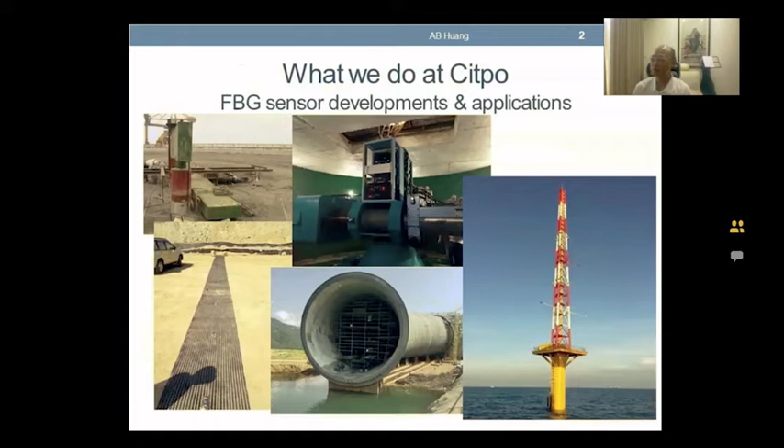My name is Huang. I'm representing CITPO Technologies in Taipei, Taiwan, to talk about photonics applications for disaster prevention. What we do is mostly concentrated in the development and applications of FBG sensors. Most of the applications are related to ground behavior or any disaster that may occur in the ground. To start with, I would like to give a very brief introduction to FBG, what it is. Optical fiber Bragg grating is the full name.

It's basically a change in a small section, about 5 millimeters long, of optical fiber, where the refractive index changes periodically. The optical fiber has a diameter of about 250 microns. It's about the size of a human hair.

The periodic change of this refractive index is similar to putting your five fingers on your arm and exposing the arm under the sun. After a while, if you take off your hand, the uncovered parts will turn dark, and the covered part will be light, sort of like this grid pattern in this slide. Except in FBG, we may have about 10,000 of these grids concentrated in about 5 millimeters length.

The spacing between the lighter and darker parts we call capital lambda. And when we insert laser light into the optical fiber, when it encounters the FBG, part of it will be reflected back. The wavelength of the reflected light, lowercase lambda b, is related to the refractive index and capital lambda, the spacing of these grid patterns.

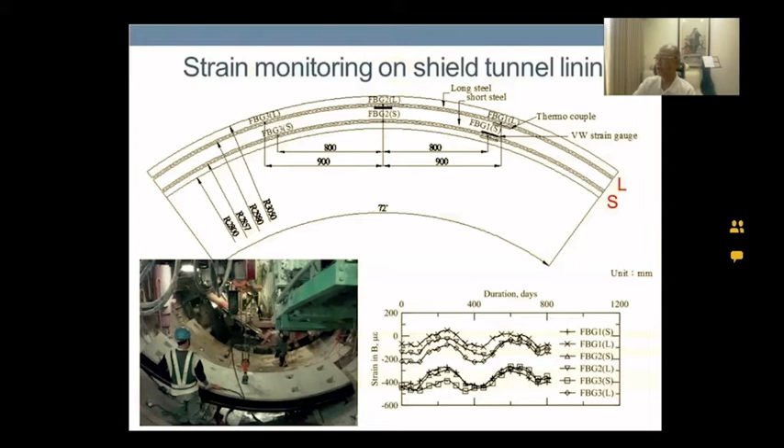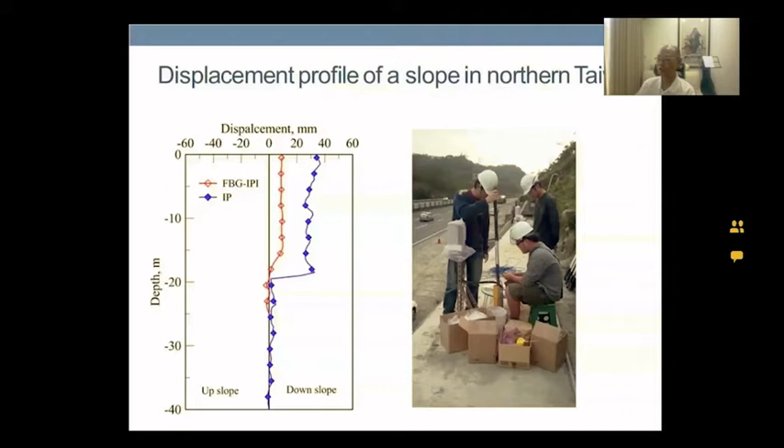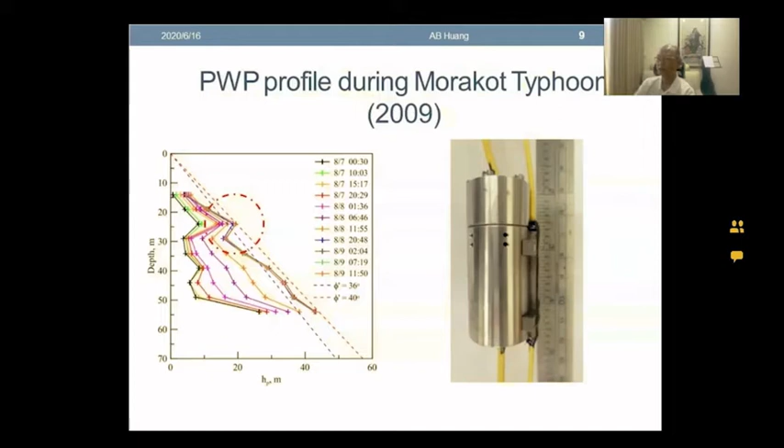In this case, just to give you a very basic sense, the pore pressure increased by as much as the equivalent of 30 meters of water level, which is about 10 stories high. So the increase of pore pressure is very extreme, and that's why it caused a lot of slope failures in that region during that typhoon. That also tells you the importance of monitoring.

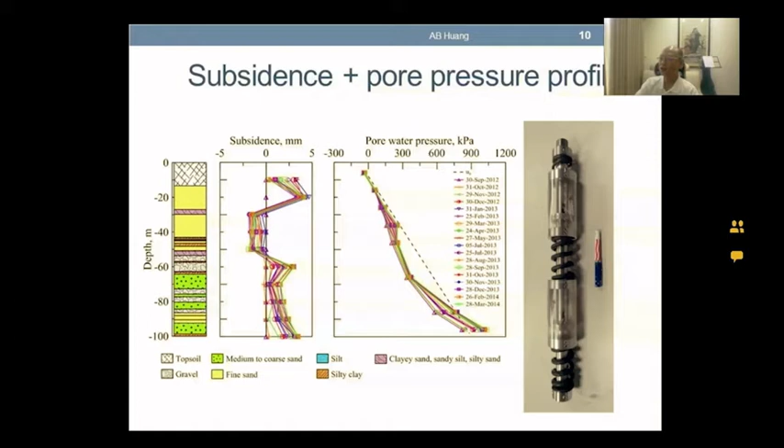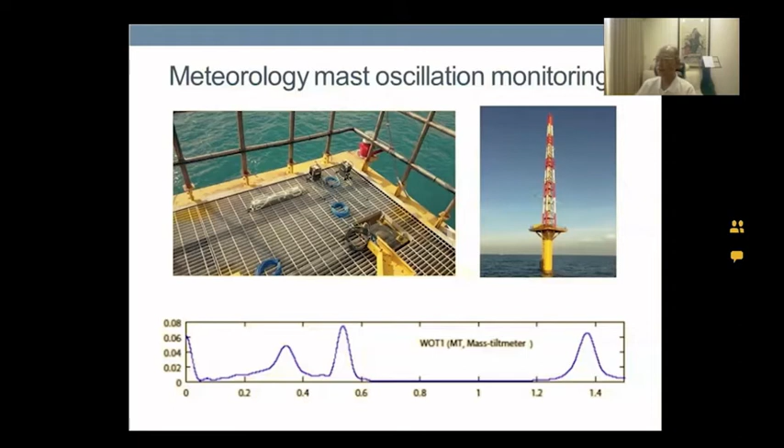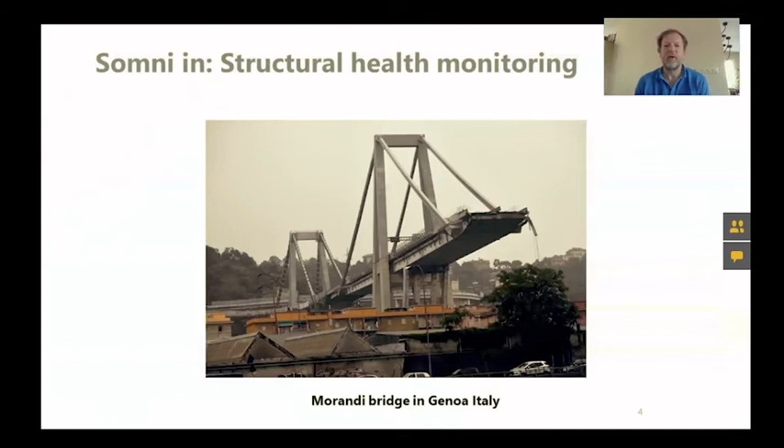To start with preventing disasters, we probably all know this bridge. This is the Morandi Bridge in Genoa, Italy. About 2 years ago, it completely collapsed. That was a big disaster and quite unexpected for a lot of people. But on the other hand, they already knew that there were things going on with that bridge. At the moment they are building a new bridge.

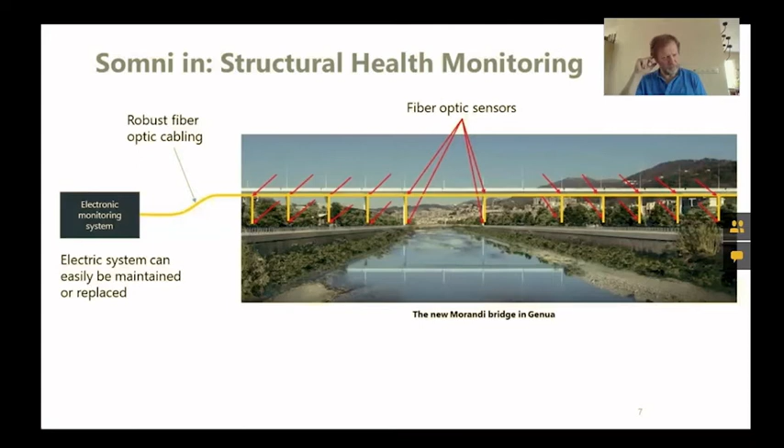Well, the big question is, why do people use fiber optic sensing for these kind of applications? And that all has to do with robustness. It is a fact that the fiber optic sensors are extremely robust and have a very big lifetime. That's a topic I would like to address a little bit later again.

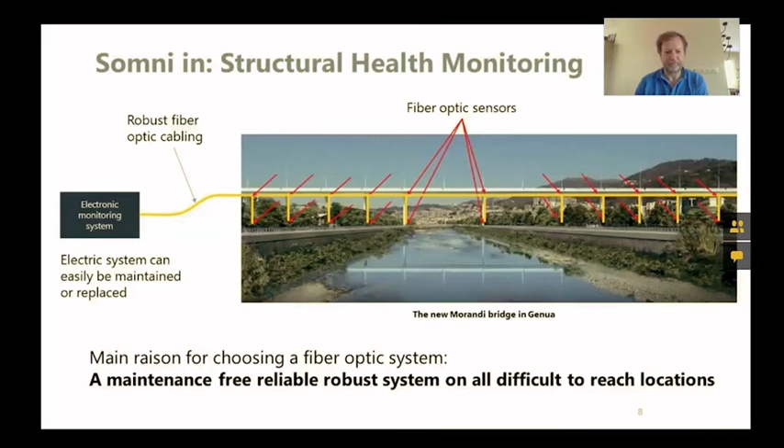Another thing that Somni is busy with, for example, we make a lot of sensors. We also have sensors in the medical field. We make sensors for defense, hydrophones, very little pressure sensors, things like that. But I wanted to pick out one because I think it's very interesting.

These are sensors that we built at the moment for a big science project, and it's called ITER in France. We probably all know the ITER project. It's a very big nuclear fusion project taking place there, in which nearly all the world is involved - China, Russia, the USA, Europe, Japan. All countries are involved in that big ITER project.

There's a lot of radiation there, and it's a lot of vacuum parts. So we took one of our types of sensors, the 80 picometers per G sensitivity sensor, a standard sensor, and we modified it for vacuum compatibility and made it radiation hard and stable up to a temperature of 170 degrees Celsius.

At the same time, they also needed temperature sensors, so we also developed vacuum compatible, radiation hardened temperature sensors, which can range up to 300 degrees Celsius. These sensors must be ready in September this year and then will be shipped to the ITER project. And as you can imagine, there's also in this case a very big issue with reliability and robustness of the sensors. So I would like to give that some extra attention.

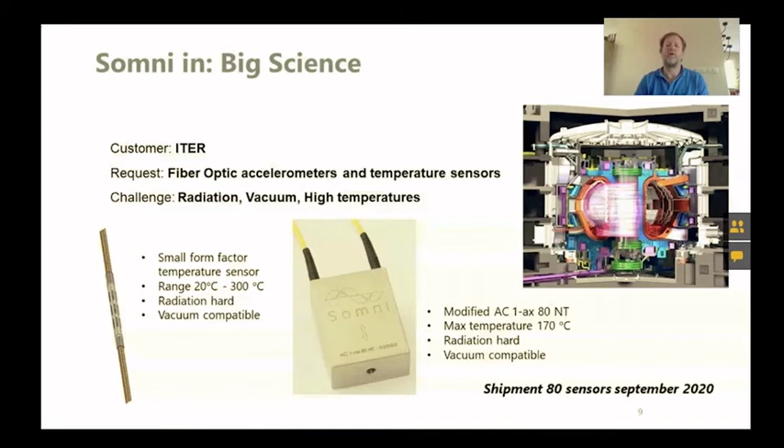We make very small movements - only movements of less than 20 micrometers. That's about a third of a hair thickness. And the stresses in our materials during its lifetime are very, very low. It is always below 0.5% of the maximum load allowed for that type of material.

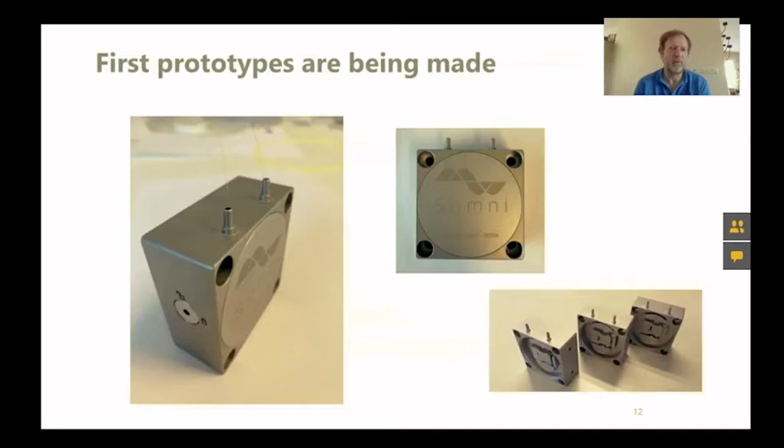The sensor is already being tested at TNO. We did do 2 types of tests. One test for the little bit higher frequencies, that is the left testing area. That's a very big shaker. And we did shake our sensors there. You can see them in the middle of the plate. And at the right side, we tested even lower frequencies on a universal testing machine.

And that was quite okay, but still can be improved. Something went wrong there, and if you see the test results at the right bottom, then you see that the sensor 2 died, or one of the FBGs broke, and that was because there was made a mistake in programming this testing machine, and the sensor got about 5 times the allowed

maximum acceleration that it should have, so one of the fibers broke. But what you see with the results is that they're all, the good working sensors are above 1000 picometers per G, which is what we intended to do, so that's very nice. So we think we have very good test results with the first test.

At the moment, we are developing a new generation of sensors to get better results and maybe also a little bit lower price. That would be nice. And this test will be done again at TNO with the new sensors, and they will try to improve the testing a little bit so that we have better results. And then a new exciting period will start, and that will be testing together with Citpo in Taiwan.

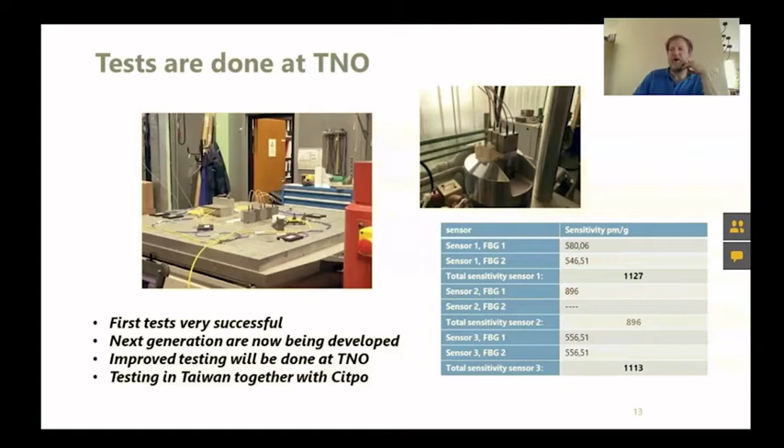And I think we found the best test location and the most exciting test location you can ever find in your life, because we are allowed to test this sensor on the golden sphere that is in the Taipei 101. The Taipei 101 has been the biggest building in the world for about 6 years, from 2004 to 2010. It is 508 meters high with 101 floors.

And the Taipei 101 is, of course, built in an area where there's lots of earthquakes. So to protect it against these big shocks, they put in a sphere at the top with a mass of 728 tons, all supported by dampers around it to dampen the vibrations in the building and to, let's say, eat the energy out of an earthquake.

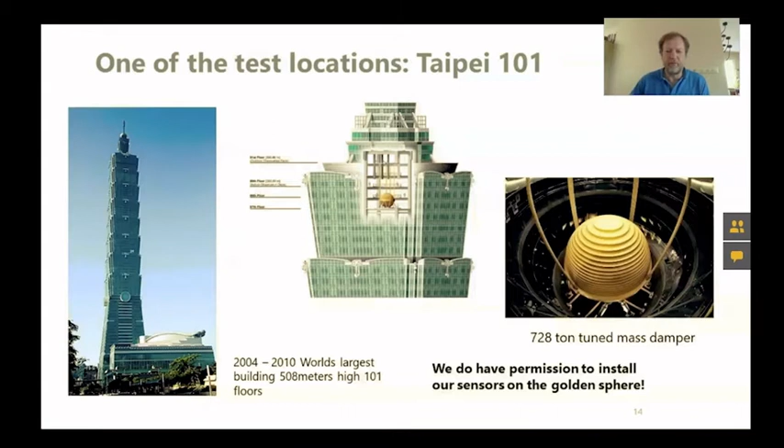So we are allowed to put sensors on the golden sphere, which is really the best marketing place in the world, I would say. There is already a lot of sensors in the Taipei 101, also frequency sensors for low frequencies, and they are measuring there day in, day out, all day, all the year.

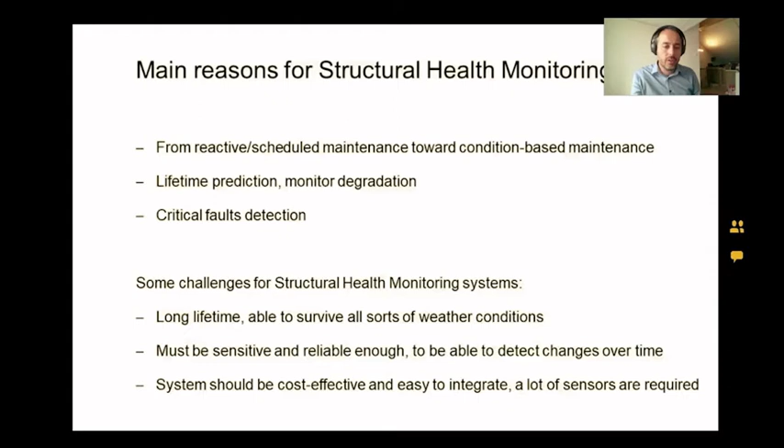If you look at the current trends today, I'm not completely sure about the numbers in Taiwan, but 1 out of 5 bridges in Europe is in poor condition. That means they are at the end of their lifetime, and they probably need to be fixed soon. And so new construction and innovation projects start to more and more integrate structural health monitoring solutions. And basically, a good structural health monitoring system can extend the asset lifetime and avoid failures that are very costly.

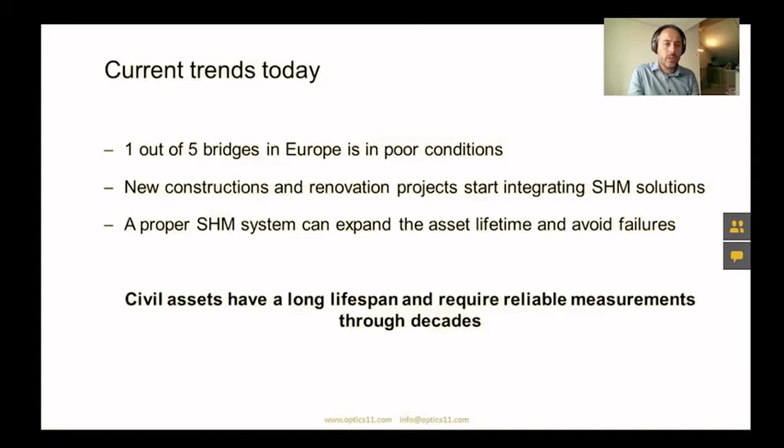Now, what does fiber optics bring to this solution? You're probably all aware of the advantages of using fiber optic sensors. But for structural health monitoring, I want to highlight a few of them. You can have a dense grid of monitoring points, so it's easy to chain a lot of sensors together and fix them all to your asset.

It's long-term stable. There are only a few parts inside those sensors, so they can last for a long period of time. They can also be far away from your measurement system, which is the big investment of your system. And they can be exposed to all kinds of environments, which is also very important. Lightning, weather, liquids, radiation are easily dealt with by fiber optic sensors.

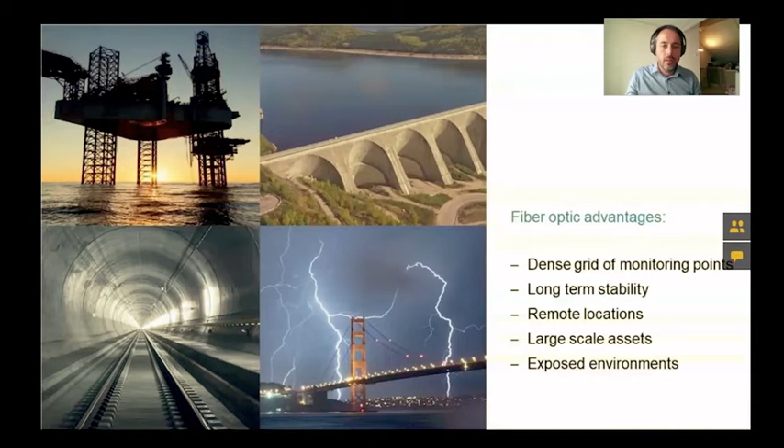Now, if you look at a fiber optic system overview in general, you have a readout on the left, which can be stored far away from your asset. In this example, it's a bridge. Then you connect that part with some cabling, which can be up to kilometers long, because it's only light that goes through the cable. And then you look at your sensors at the asset.

They're completely passive, so there's no power required. So that makes it very useful. They're very sensitive, and they have a very low noise level over long distances, immune to all kinds of radiation. And as said, they're very rugged, so they can withstand all outdoor conditions, including lightning, for instance.

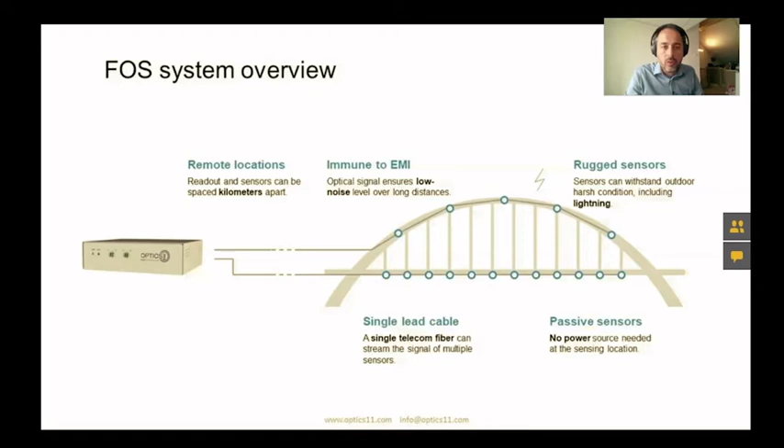Now, what does Optics11 technology offer to this application? Basically, we're focusing on 2 types of systems. The first is the NovaFAS, which is the most accurate and precise FBG system available. It covers the low frequency measurements, so strain, temperature, and load, and it measures those parameters over time with a high level of precision.

And on the other end of the spectrum, we have an acoustic emission system, which looks at the high end, when cracks are actually occurring in the structure, up to hundreds of kilohertz, and that system is called OptimAE. We have a broad portfolio of fiber optic sensors that we connect to both of those systems, the application experience to install them, and a very reliable partner network that we can involve to do the installations.

A few words about the systems themselves. So again, the NovaFAS is a high-end FBG. What makes this system unique is that it's self-calibrating. Each time we send a sweep of light into the fiber, the light wavelength is calibrated. So that means there's long-term stability over time.

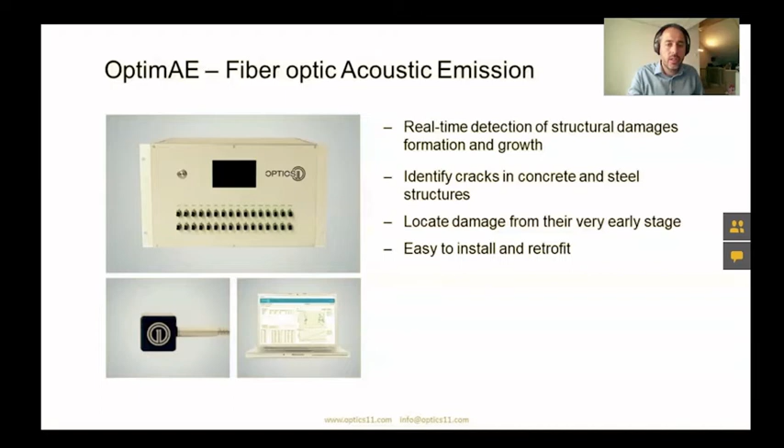Of course, if you install a system, you need the infrastructure as well. So as a system provider, we also provide the accessories and the other things that are required to make a full system. So the cable network, the place where you can store the equipment, the readouts, and also the access to the outside world, because you need to look at the data.

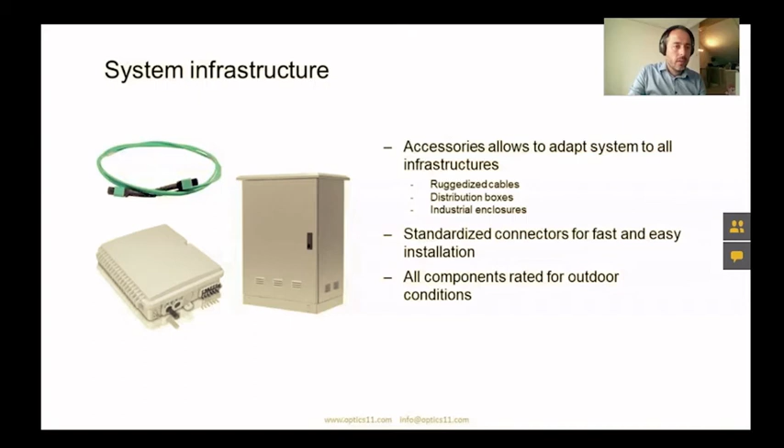If you look at the data itself, we provide a very basic portal that can look real time at your data from the asset, and I think this is quite interesting because if you have all your sensors connected into a network, you would like to have monitoring or warnings when a certain threshold is crossed.

So what we do, we have a local site which has the sensors and the data acquisition, basically the data goes to the data gateway and will be sent out to the cloud through either a wired or wireless network. And from the cloud, it can then be accessed through a web portal, where you can look at your data real time, and you can customize these dashboards to the asset or to the type of sensors that you would like to monitor.

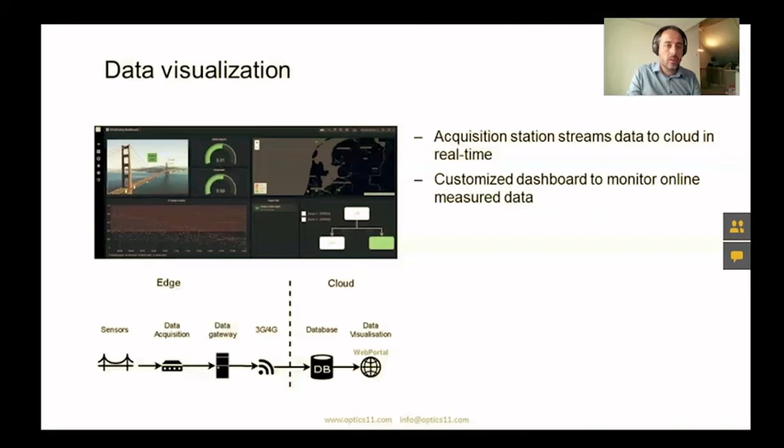I would like to discuss some of the examples where we applied these systems. So this is a bridge, the IJsselbrug in the Netherlands. Basically, this is the real-time monitoring of critical spots of this bridge. It's a concrete bridge, and we were involved in installing 35 strain and temperature sensors and measuring this bridge over time.

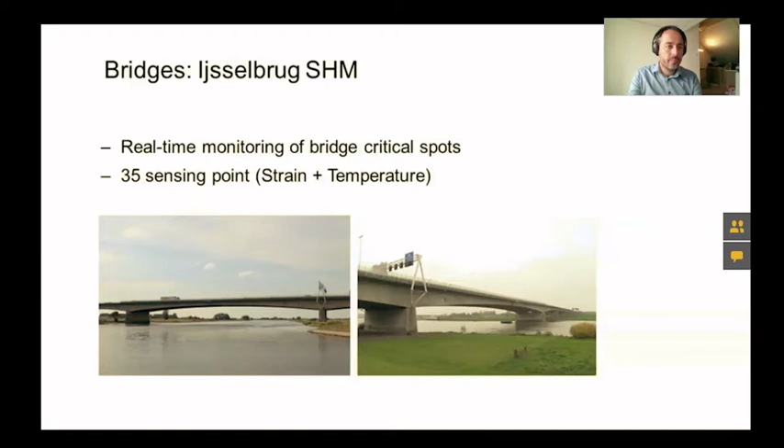Another example where this is applied is in a cave, a marl cave in Valkenburg in the south of the Netherlands. And their question was to have real-time measurements on the stability of the cave. There are a lot of tourists going inside each year, and safety is their concern, and they want to know whether there is any movement of the ceiling. So we installed 80 sensing strain strips, as you see in the picture, which see whether the ceiling is stable, yes or no. Of course, with the dashboard as well.

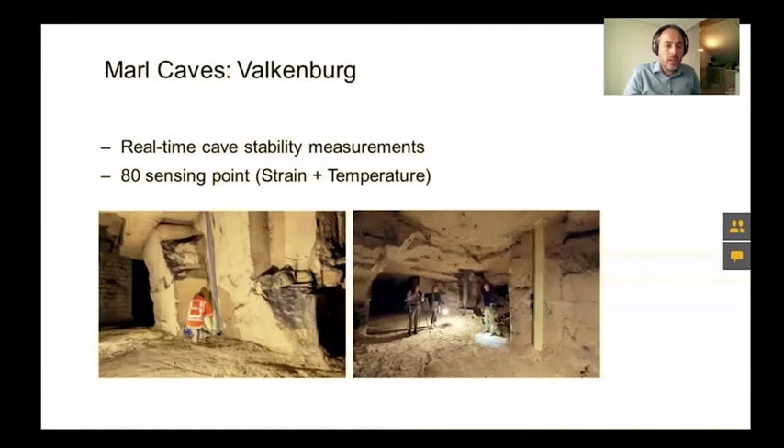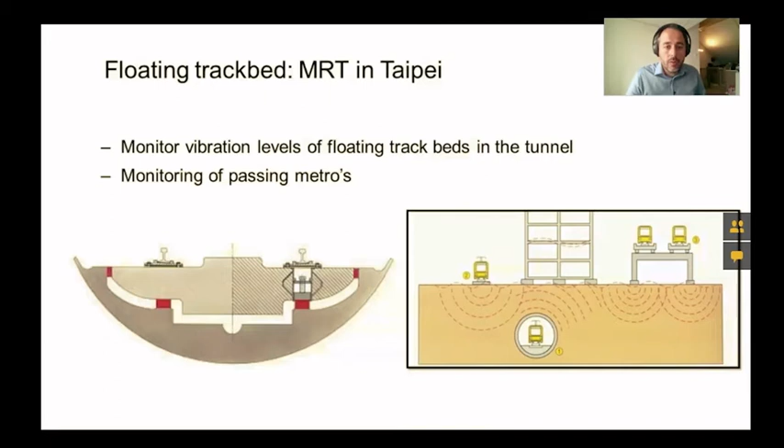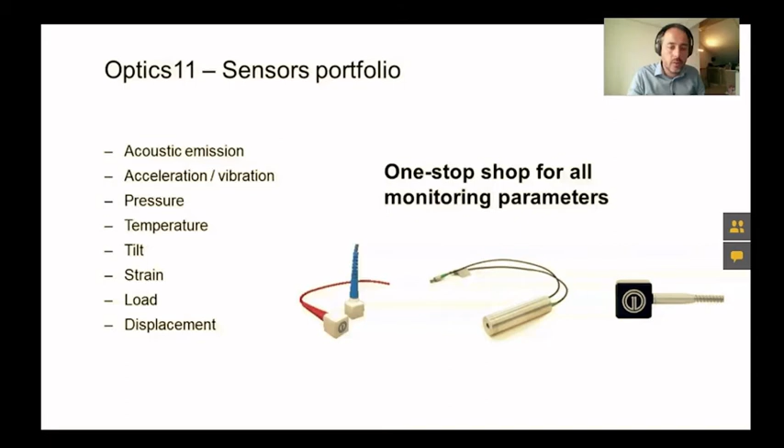Now, the last slides are about Optics11 as the company. So we like to consider ourselves a one-stop shop on monitoring parameters. That means if you want to look for high-end acoustic emissions or high acoustics, you might measure vibration, all the way down to strain and load and tilt sensors at a low frequency with a long and stable period. We have a solution for that. We make everything ourselves, so we have complete control over the complete setup.

Basically, we are based in Amsterdam. We have a small R&D office in Dublin and a distribution network all over the world. And we are at 55 people and growing heavily, and looking forward to seeing what kind of challenges we can solve in Taiwan.

Let's go to some questions. Maybe in the meanwhile, a question to Optics11. I see also that you work a lot on the visualization and with software. Do you think the software development becomes more and more important?

Basically, that's something that we recently started, and I think it's a very powerful tool at the end for the end user and for the asset owner to have real-time access to the data. Of course, it's very technical and very difficult to install and make sure that everything works. But basically the question of the asset owner is just how is my structure actually doing and what is actually happening at this time.

And by providing this in a cloud-based solution with some basic parameters, you can actually evaluate this every time of the day, and with some thresholds installed you get a signal that some values are crossed. We think it's quite powerful. Okay.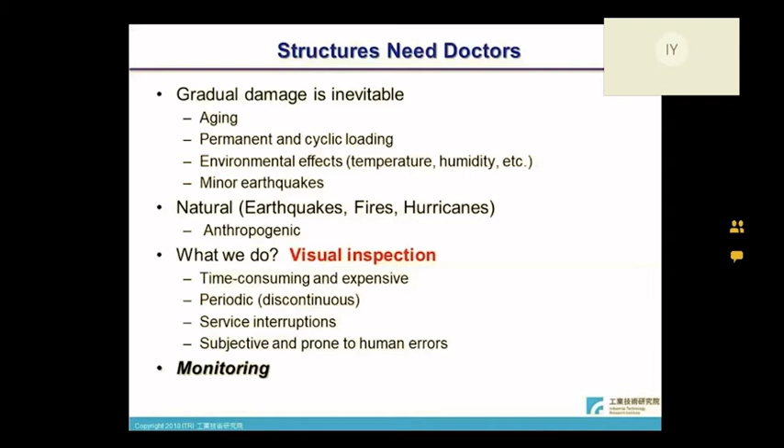This year we have a new project about structural health monitoring through a digital twin. The idea is to connect the real world and a digital world together. We consider design, operation, IoT data, analysis, machine learning, and IT integration.

This year we took an oil tank as a sample, and we used LiDAR scanning of the profile to diagnose which is deformation and which is corrosion, and we show it in the digital world. In that topic, we noticed that corrosion happens all the time in Taiwan, much more than deformation and other problems.

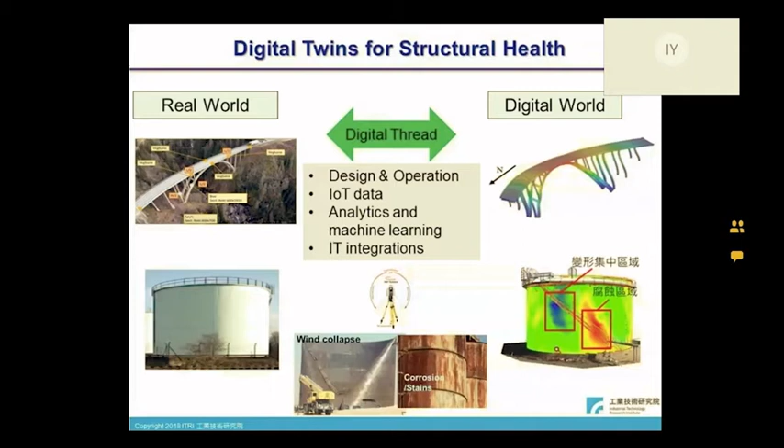So we have a new idea to share. The corrosion problem in Taiwan is very serious, like atmospheric corrosion, pipeline corrosion, environmentally induced cracking, MIC, and CUI. This corrosion causes a lot of cost in Taiwan, especially in the petrochemical industry.

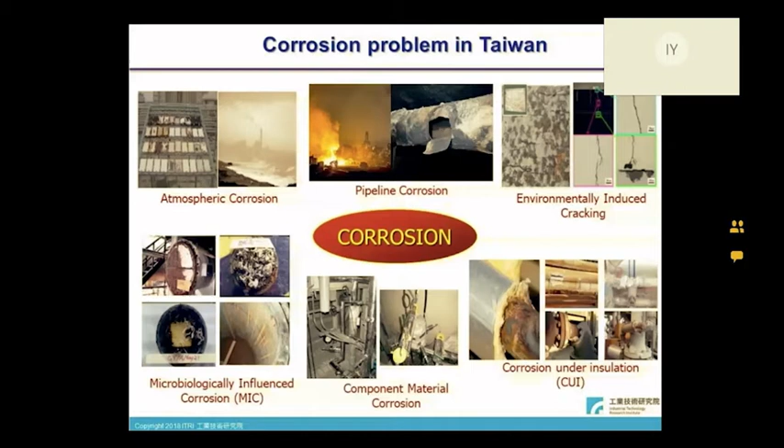ITRI, our division, put a lot of effort into solving this problem through new and old skills like NDT technology and corrosion monitoring technology. In NDT, we find the location according to the risk matrix, and we use UT sensors, laser scan, RT, and failure mechanisms analysis and implementation.

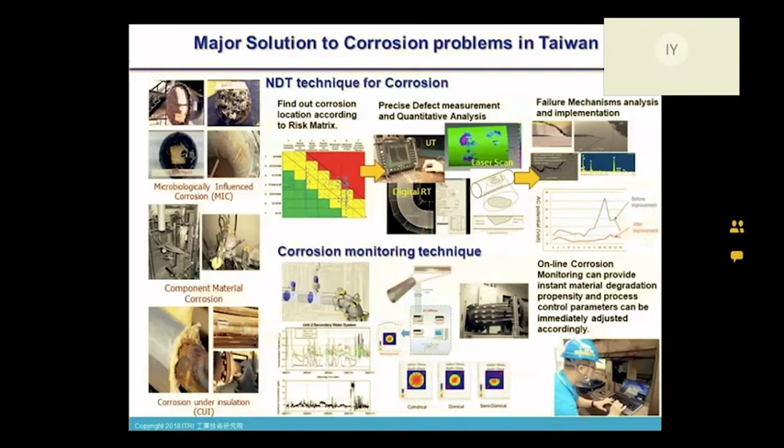For monitoring technology, we always put ER probes into the pipe, or we do online monitoring with UT. However, this technology is not good enough. Last year we had some cooperation with Mark, and we noticed that fiber optics is a very powerful sensor for monitoring. So we have a new idea starting from the mechanism of corrosion.

We want to protect our structure from corrosion, so we have a paint system on our structure, like epoxy and PU for UV resistance and water resistance. However, like I just said, aging and degradation always happen, like blistering, cracking, and rusting.

We noticed that all these phenomena change something fiber can sense. They cause temperature change on the surface and some deformation on the surface. That's what we want to measure through fiber optics.

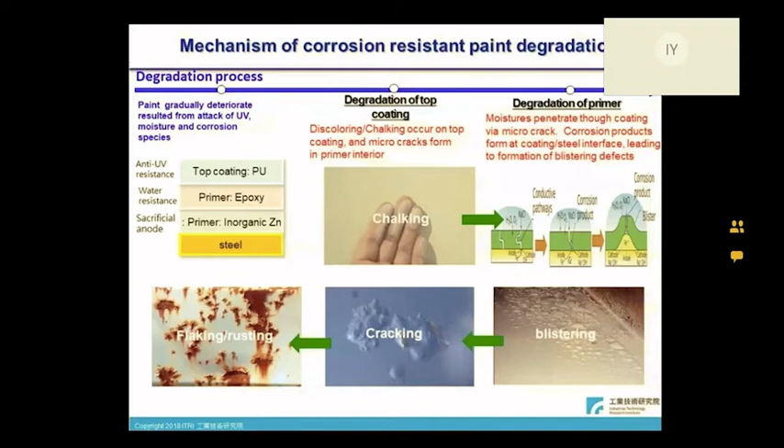As I said, ITRI put a lot of energy into anti-corrosion, so we already know the paint system design. So here we have a new idea: can we design through the paint system, control the corrosion mechanism, and decide what phenomena should be shown and monitored?

So we put it all together in a new cycle: we do a new design for the paint system, and based on this design, we design our new monitoring system with optic fiber. I'm sorry it's a little rough here, and this is my presentation. Thanks for your attention.

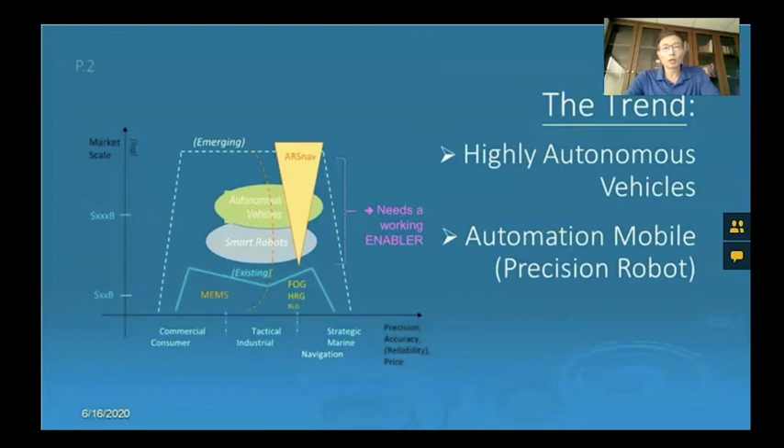So what exactly can ARSnav offer and how? Unique design is one of the key factors, and efficiency in process and integration are the other 2, from which the industrial infrastructure here in Taiwan does benefit. We also plan to have more key components made here in Taiwan. Our Precision 100 series is engineered for general navigation, stabilization, and precision attitude sensing feedback. This one is scheduled for launching this October.

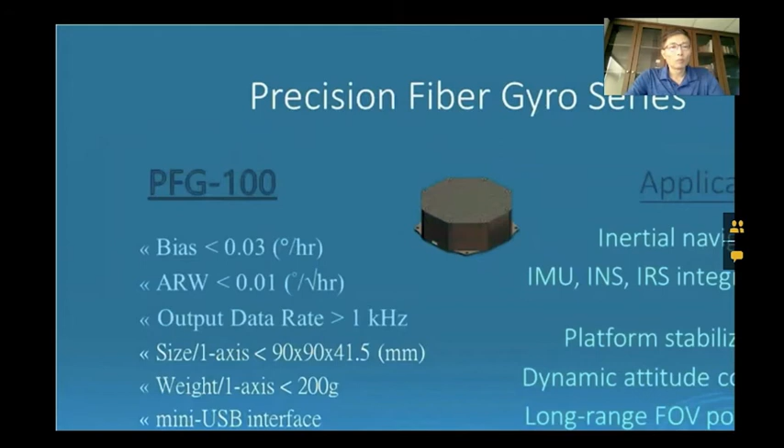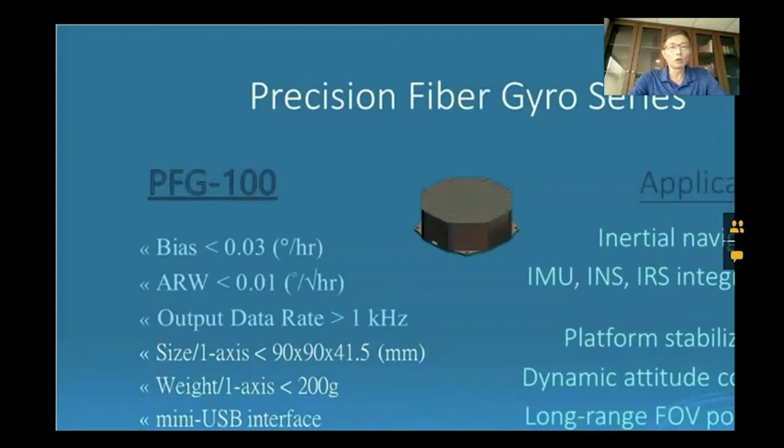Here's our higher sensitivity series, intended for deep, autonomous, and long-term operation. This one, higher sensitivity fiber gyros. Okay, let me quickly explain to you how the 2 most important parameters of a fiber gyro correlate to navigation accuracy. First one is the bias of a gyro. It's the angular rate output when the sensor is actually static. Ideally, it should be 0, but usually it is not. So you can imagine how it accumulates into large angular errors as the task operating hours increase.

Assuming that the deterministic part of the gyro has been calibrated out, say, by accurate modeling, then you will see angle random walk as the fundamental limit of your accuracy. For example, here is our gyro, which was tested to have an angle random walk parameter of 0.002, or 2 milli-degrees per square root hour. Then how to use that in practice? You just multiply this parameter by the square root of the operation hours. Then it will give you the cumulative error in angle at the end of the task.

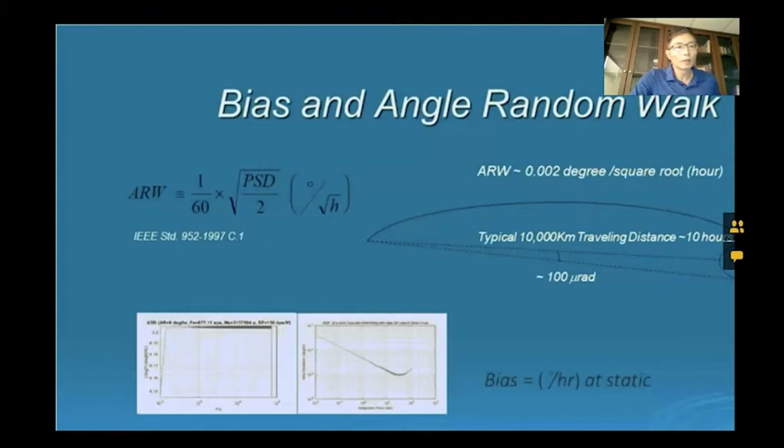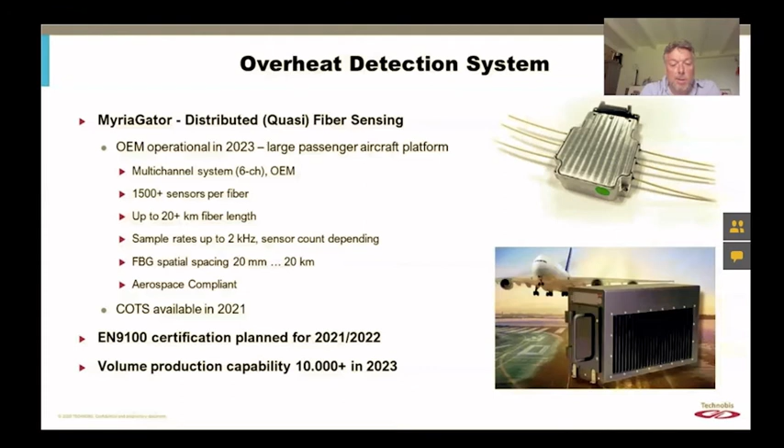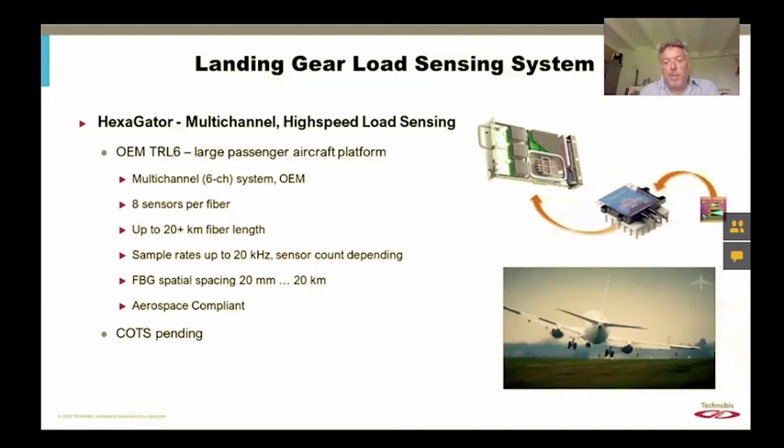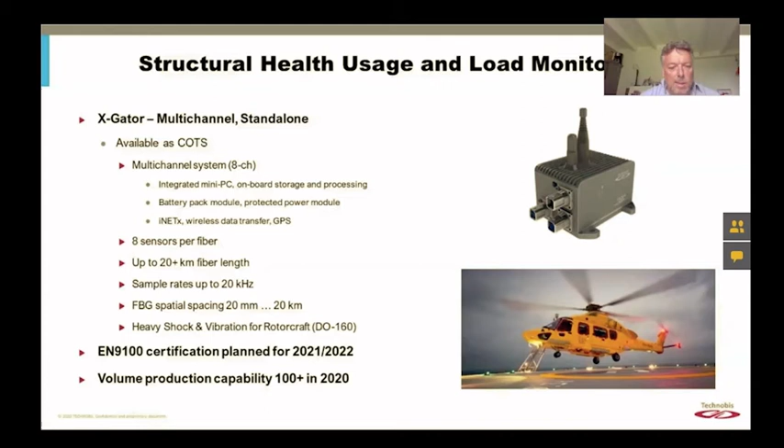Another example is extreme dynamic loads monitoring. It's one of the many research programs where we investigate using fiber sensing for various applications in aerospace, typically structural health monitoring, where we look at damages, impacts, and load monitoring on structures.

With extreme loads, you must think about large deflections that can happen at aerospace structures which we need to monitor, and at the same time small vibrations or low amplitude vibrations if there are any during operations. For that we developed a system, the Supergator.

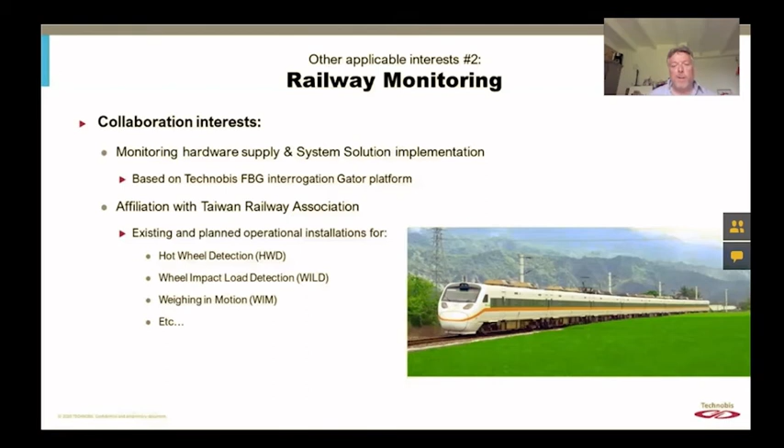So then the products, about our vision, how we see this developing. Next to the OEM type of developments we do for aerospace, which are very dedicated systems for specific applications, we have a general roadmap where we anticipate a volume market more and more.

A little bit of history: in the early days of Technobis, when we just started with fiber sensing, we built a free space optics device called the Deminsys. Around 2011 we started to use integrated optics technology, on a request of ASML in the Netherlands, a semiconductor company. They needed a sensing device that was cost effective but still extremely high performing in high resolution measurements, and we managed to do that only with an optical chip, where the conventional free space optics technology was not capable of doing that.

In the laboratory, we managed to detect wavelength shifts in the order of attometers. That's one of the big advantages of optical chips: they are small, so you can stabilize them mechanically and thermally, and make them sensitive in that way.

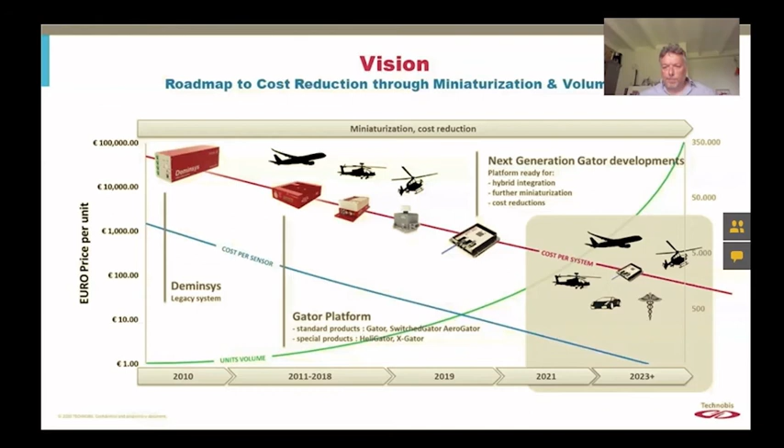We anticipate the prices go down per system, the cost of sensors goes down, while the volumes are going up. It's of specific interest to markets like automotive and medical. Okay, so that's about the vision. We have a strategy.

We're developing our technology in 4 generations. We had our first generation as free space optics. Then we started to develop generation 2 with the standalone desktop systems, which we call Gator systems. Nowadays we are in generation 3.

Which we launched for high volume medical applications, railway, wind turbine, road monitoring, pipelines, and so on. And the next step would be generation 4, which we just started.

This is really about extremely low cost standalone devices the size of a USB stick or a matchbox, applicable to high volume markets like medical disposables for guide wire and catheter systems, automotive battery measurement systems for thermal management in electric vehicles, perimeter sensing, data centers, temperature monitoring, but also security, and so on. So we are really anticipating high volume in this case.

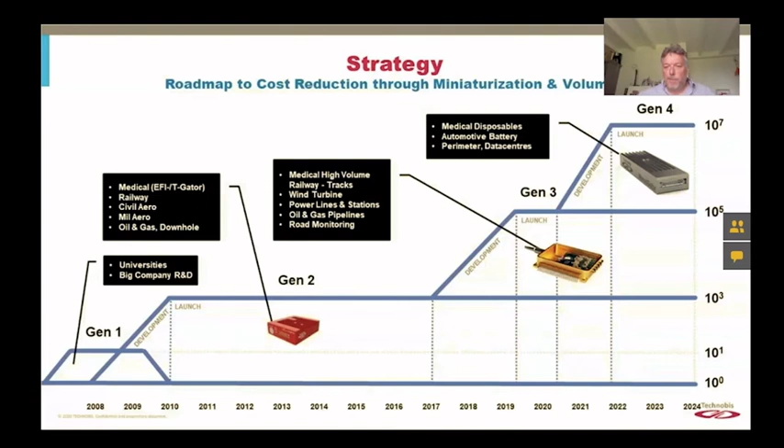Just to give you an idea of the size, it's really matchbox size and even smaller than that. Extremely miniaturized, reduced power usage, wireless data transfer options, really reduced costing, which is very important if you are entering the high volume markets where the margins are very small. And every increase in cost has an enormous impact.

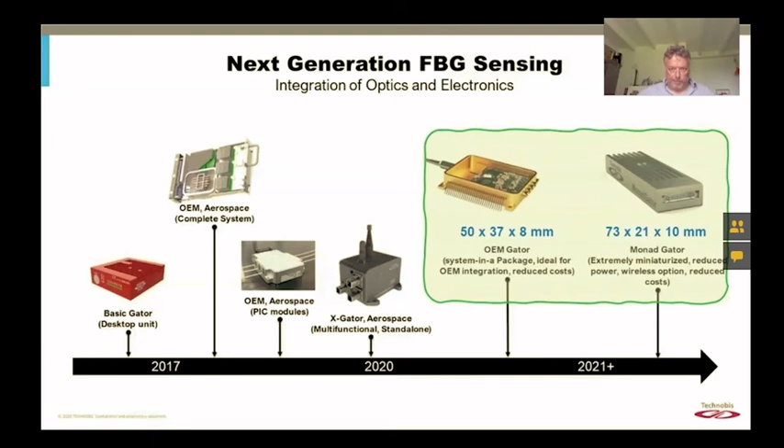So with that, I would like to conclude my slides. For us, it's all about volumes and industrialization and module development. And the applications that we serve, we do with partners that have an interest in high performance systems. Thank you.

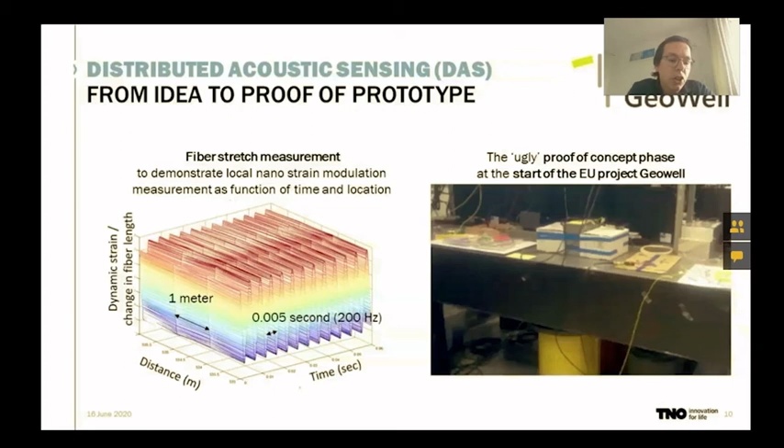So what it does is that along a fiber, which can have lengths up to 10 kilometers or even more, you can measure that dynamic length change of that fiber optic sensing cable. Here is the unit shown as we use it in the Iceland project.

We started with the Iceland project, and in the end we have a unit that we now also use for research and development, because with this DAS unit we have full control in, for example, tuning the gauge length, the sample pulse frequency, sampling resolution, and the laser pulse width.

One is for using, for example, dynamic load measurement. So in this case, we embedded a fiber, and here you see a concrete slab, and this concrete slab we could actually move, in this case a concrete block. It was done by hand.

The presenters before showed examples of what they call weigh in motion. And what we also did in this project is that we actually measured the concrete block moving over this concrete slab. So what you see here is, over time, we could see the movement of that concrete block. So DAS can be used, for example, for weigh in motion.

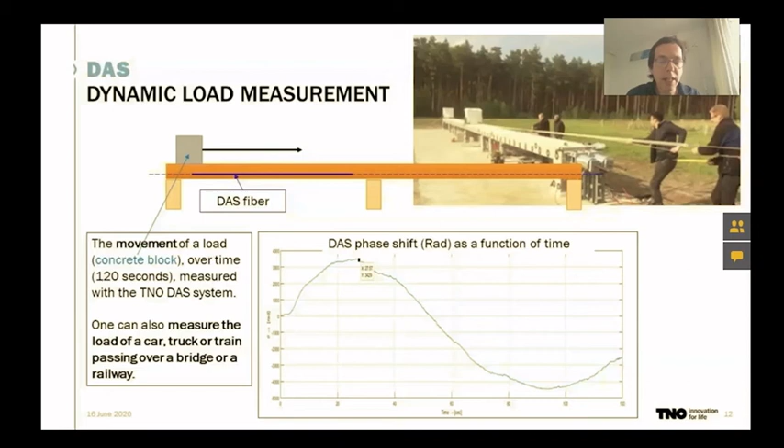DAS can also be used for vibration measurement. This is an example of a concrete bridge in the Netherlands. In this concrete bridge, again, we glued a fiber below the surface of the deck. And then we did FEM calculations.

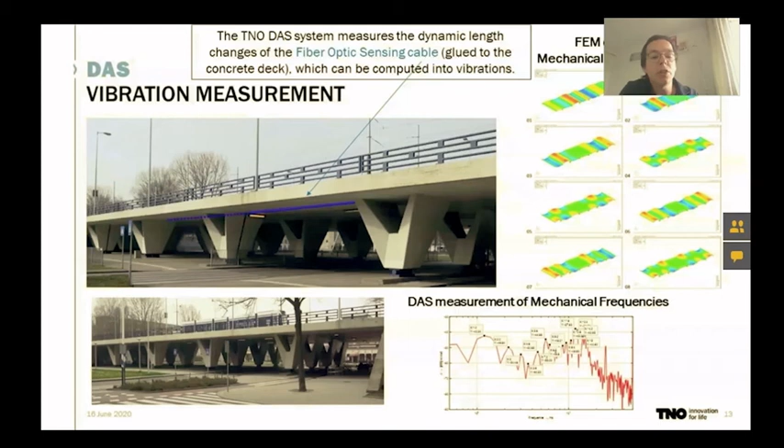What we did is the dynamic length change of the fiber was translated into vibrations, and those vibrations were compared with the FEM calculations, and they showed a good match. Those results have been presented in a paper last year.

Now, the same thing you can do with distributed strain sensing. That means the same fiber can now be used for another unit. So instead of DAS, you can connect it to a distributed strain sensing unit where we can measure the static load.

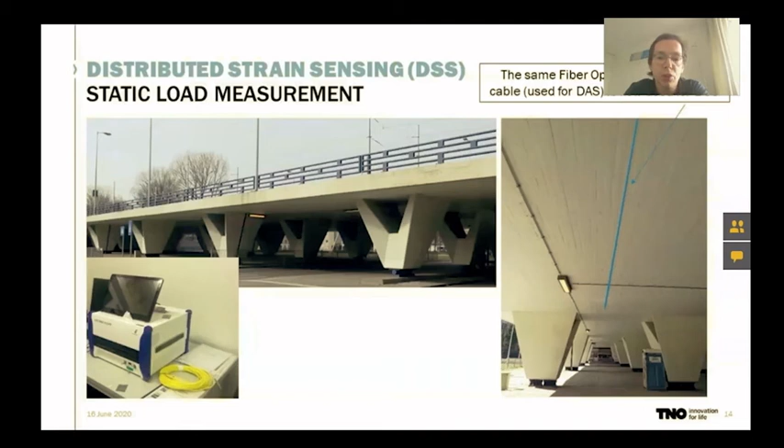Here the induced static load is shown. So during a night, we put several different trucks on it, and we compared the measured strains with the distributed strain sensing technology. In this example, we show that we had a very good fit with the distributed strain sensing technology compared to current fiber optic sensing or just electrical sensors. In this case, the orange line is the distributed fiber optic sensing strains that we measured at several locations.

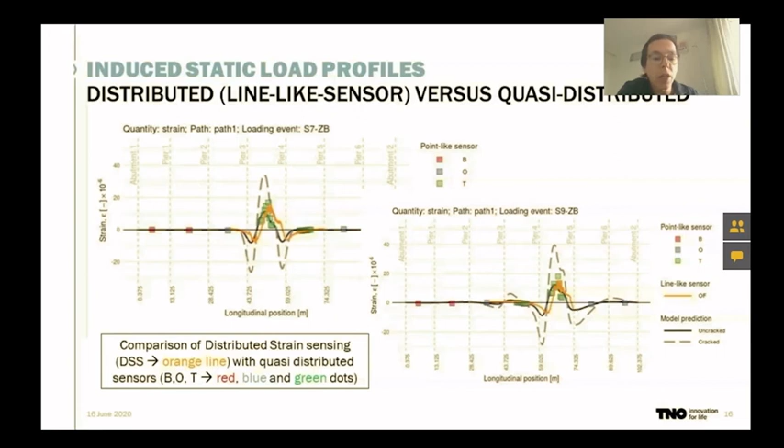Okay, this is about distributed acoustic and distributed strain sensing. The next topic is about chemical sensing.

In this project, what we do is make use of a coating that is chemical responsive. So we actually have a fiber, and the fiber could contain, for example, a fiber Bragg grating, and on the cladding we put our chemical responsive coating. By doing so, we can make it sensitive to different chemical parameters.

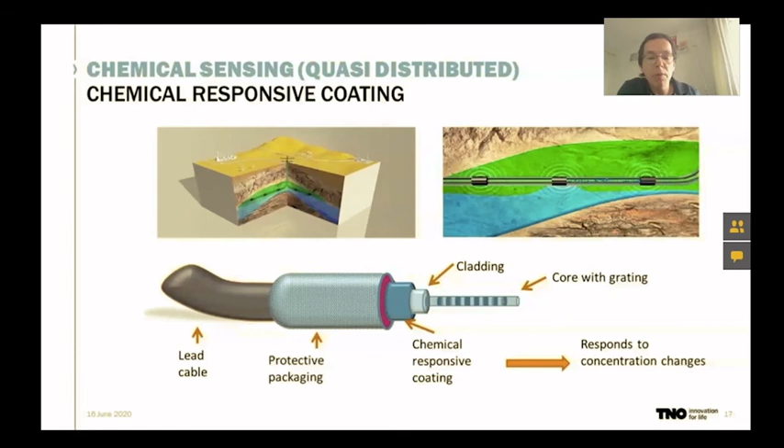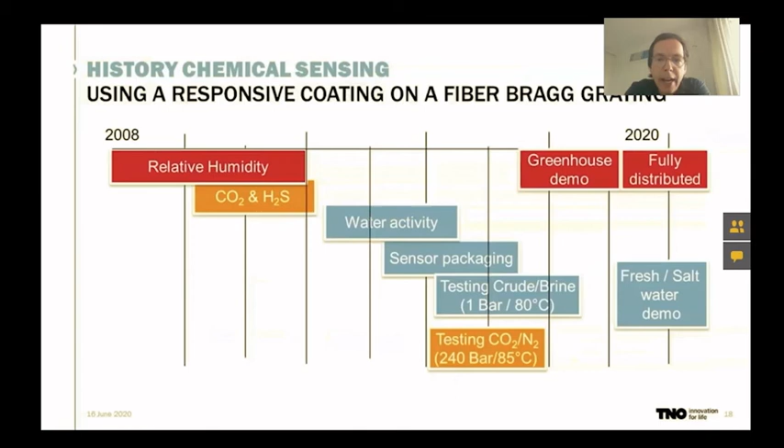I would like to touch upon one example, which is the fresh salt water demo project. In this project, it's aimed to measure in the underground actually the threshold where there is fresh water or where there is salt or brackish water. So we want to know the interface of fresh water that can be used for agriculture or for drink water purposes. On this slide, you see where we are with the project.

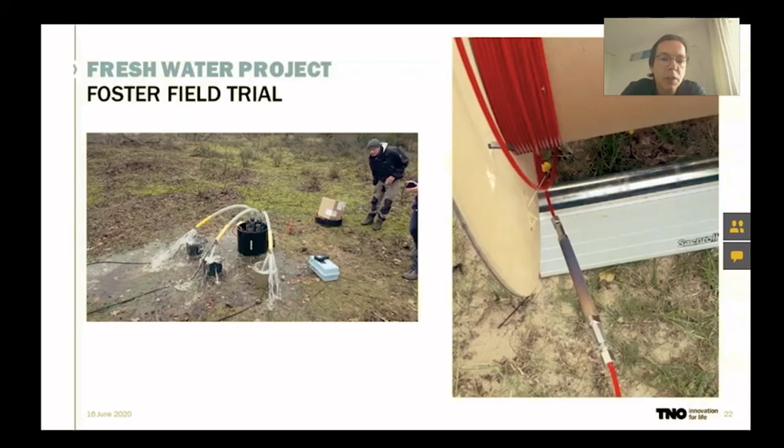We have two field demonstrations, and this is a well close to Amsterdam, which is about 100 meters deep, where we put our, we call it Foster sensors, which actually measure the total amount of salts in the water.

Here's an example shown. So in this project, we now installed in a well, which is around 100 meters deep, 5 sensors, and we compare them with currently available technology, which is a so-called diver. A diver is an electrical device that they put into the well, and they need to get it out in order to access the unit. And we compared it with our Foster technology.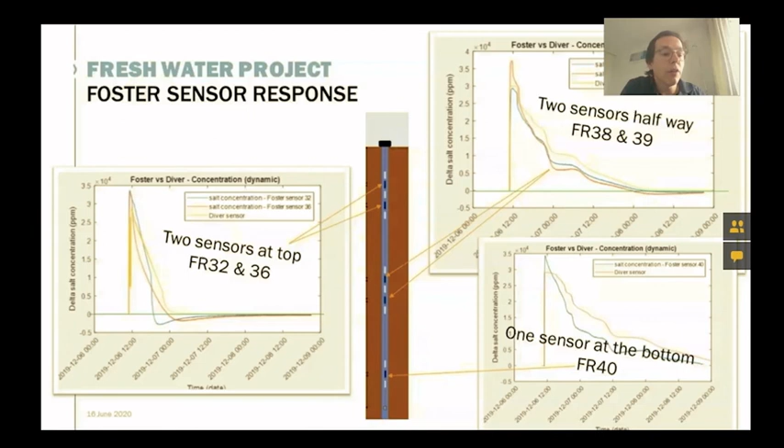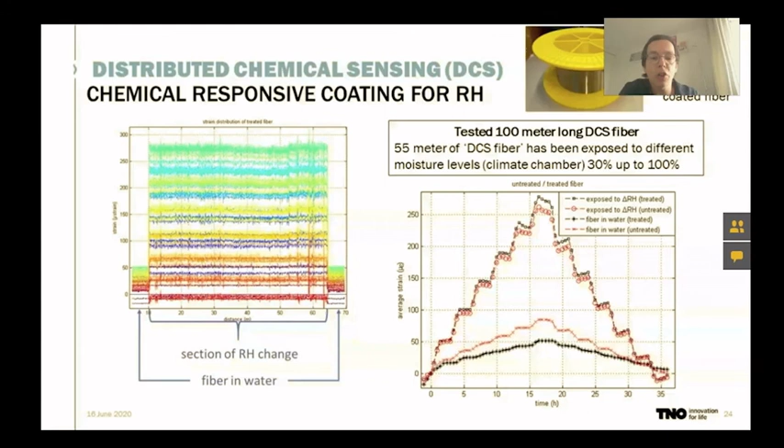In this case, we did a test where we changed the relative humidity from 30 up to 100%, and we evaluated two different types of relative humidity coatings. These are the first results shown here. Because of time, I don't go into detail. And the last sensor is about the interferometer technology, but because of time, I will also skip that one.

I would like to conclude that TNO in the Netherlands acts as a flywheel to boost innovation in different technology areas. We're active in innovative fiber optic sensing applications for harsh environments and demanding requirements. We work together with companies like Somni, Optics 11, and Technobis, and we have a large national and international collaboration network. Especially the Joint Industry Consortium on Dutch Optics Centre helps us work internationally, and the JIC DOC also helps us co-sponsor the two Taiwan Global Star projects we are involved in.

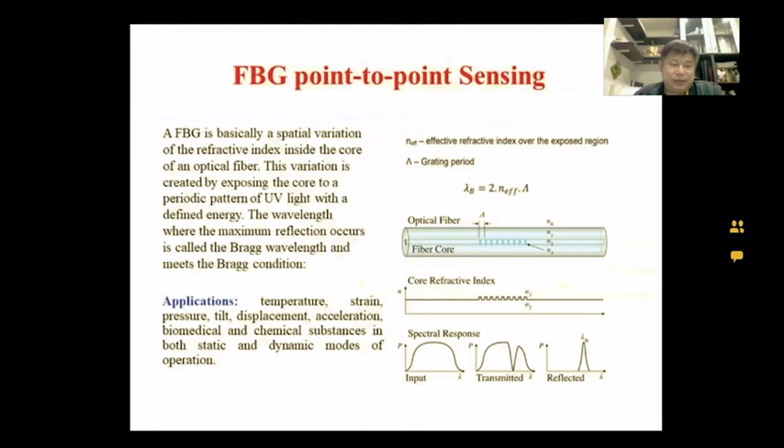In this page you can see that we can have a fiber along the land, and we can monitor some parameters along the fiber and send the signal back to the fiber end for a signal processing system and optical interrogation system for analysis and monitoring.

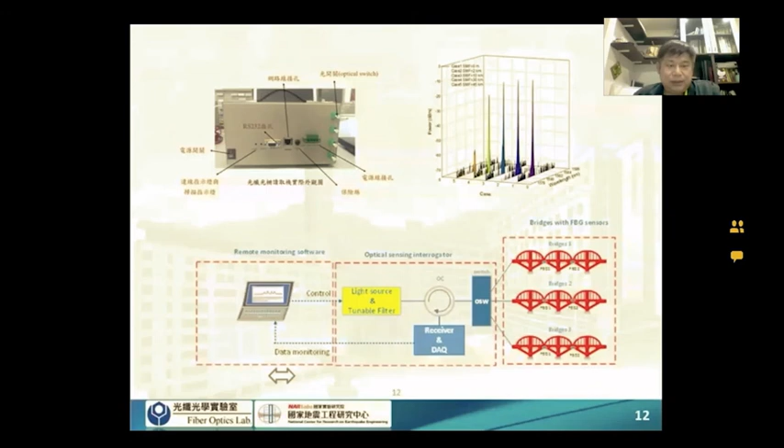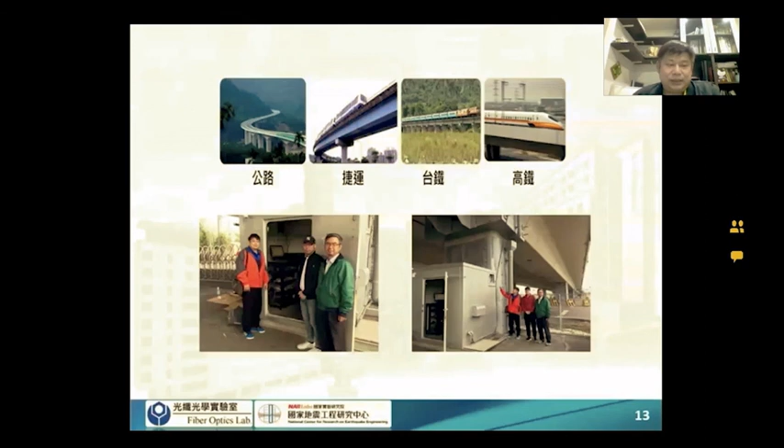Since the long period fiber grating is more sensitive to temperature and to refractive index change, while the short period fiber grating is sensitive to water level, we can simultaneously test water level and temperature, or water level and refractive index. Basically, one fiber grating monitors one parameter, and I think the accuracy is more than 95%. There is just some error, but the error can be offset by a very simple 2x2 matrix to obtain a very accurate result.

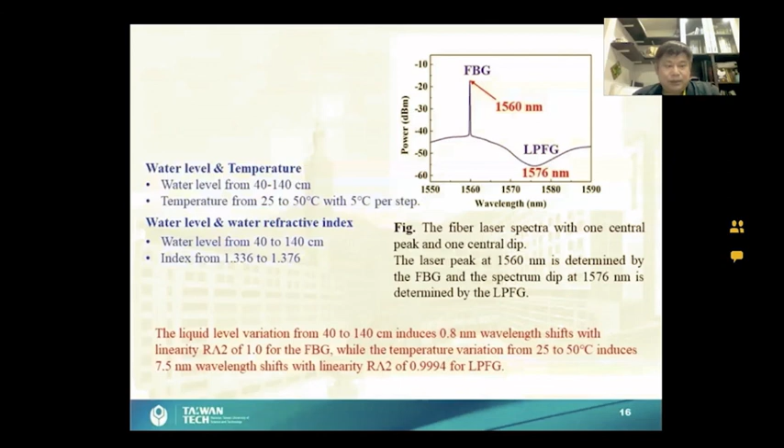Okay, the final one is another project which was supported by ITRI in Taiwan, where we developed a BOTDA optical fiber sensing system. I think this kind of system would have very good potential to be used in carbon capture and storage, with oil and gas pipelines or underground pipelines, to do real-time monitoring.

So maybe people remember that in 2014 an underground gas leak resulted in an explosion in Kaohsiung City in South Taiwan. So I think this technology is very important to develop, because people don't know where, maybe 10 or more kilometers away, something could happen at any time. So you need such a technology to do environmental monitoring. Maybe it will be more useful than a fiber grating point-to-point monitoring system in this case.

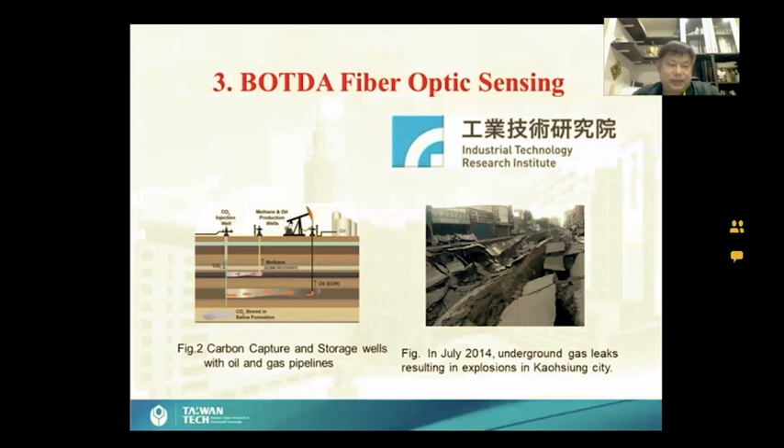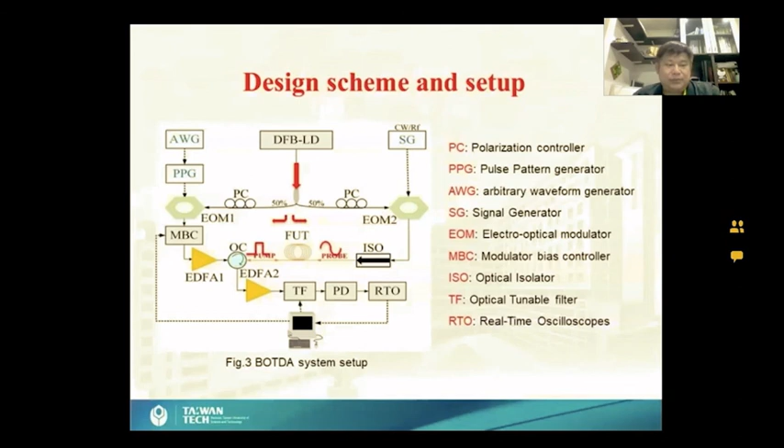Okay, and this is the setup, but nowadays we try to improve the system little by little. So we can see that I have quite a few pieces of equipment here, like a pattern generator, a signal generator, an EOM, or an optical tunable filter, and so on. But we try to simplify and modify the scheme. And you can see this is the setup.

And here you can see that we show the 2-dimension Brillouin frequency versus distance monitor and the 3-dimension system here. So far we can monitor about a 2 meter resolution under a 15 kilometer long distance environment. I think this record is not a very good record if you compare to some leading groups in the world, but we believe the record could be improved very fast, because for the past 2 years we have shortened the spatial resolution from 20 meters to 2 meters today.

So that's the 3 projects, just a very short introduction to the status of my lab research. So we welcome any industry-academic collaboration projects.

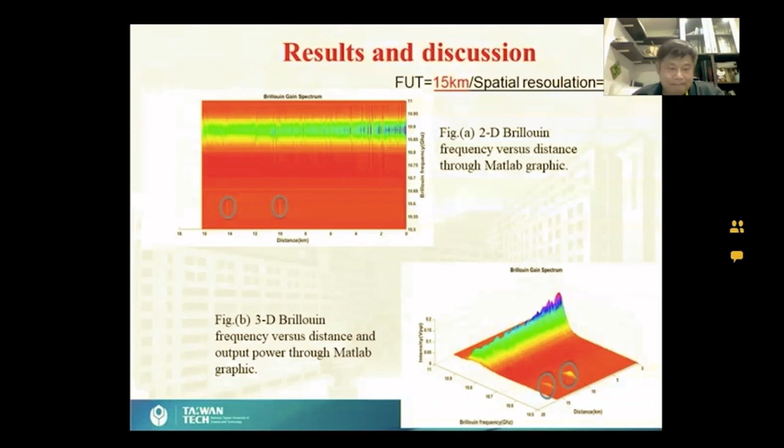Especially to the last speaker, Professor Shien-Kuei Liaw. I see many applications. Are you also looking at some special areas in which you would like to see new collaborations, for example, with the Dutch people? I think domestically in Taiwan, I have quite a few potential companies that have interest in a collaboration with me, but I'm very interested to have a collaboration with your country, with your companies. Okay, we can look into that later.

Yes, one question to Rolf. You had also an application of chemical sensing, together with Shell. Are you also looking into measuring oil spills? Yes, oil is still an interesting application. However, with the market going on, there is not much request from oil and gas companies to further develop that.

So yes, it can be used for oil and gas, but what you actively see now is that they either want to use it for carbon dioxide monitoring and storage, or we now focus more on using one of the principles we developed in the project, like the freshwater-salt project. Originally it was developed for monitoring the interface between brine and oil, but now we focus more on brine, which is actually salt water.